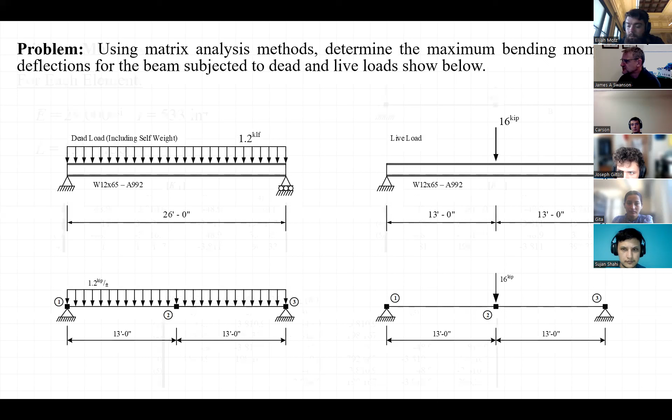One of the first steps is to develop our stiffness matrix. Even though we have two different load cases or patterns for this beam, we still only have one stiffness matrix, since the structure itself is the same for both load cases. So here's the element stiffness matrix K sub A, the element stiffness matrix K sub B, and when I assemble them you get the global structure stiffness matrix shown at the bottom.

My degrees of freedom are labeled at the top. You can see that degrees of freedom 1, 3, and 5 are displacements, and degrees of freedom 2, 4, and 6 are rotations.

I call out the beam as a W12 by 65, which has a moment of inertia of 533 inches to the 4th power. Each element has a length of 13 feet.

This is one place where I tend to confuse myself a little—sometimes I'll check my work and calculate the deflection as PL cubed over 48EI. When you use the L value in that equation, it's the span length of the beam, not the length of the elements. So you have to be careful with these types of problems, to the point where I actually keep a scratch pad to write things down, because it's easy to get confused, especially when the element length is half of the span length and so on.

Anyway, there's my unrestrained global structure stiffness matrix K.

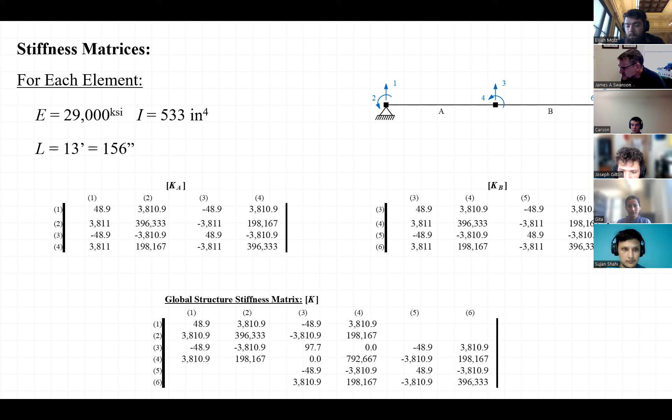The next step is to look at the loads. I'm going to examine the loads for the dead load case first, a uniformly distributed load with a magnitude of 1.2 kips per foot. The first thing I'll do is convert that load from kips per foot to kips per inch, since we're working in kip and inch units—another place where it's easy to make an obvious mistake.

So 1.2 kips per foot is equal to 0.1 kips per inch. And then when we calculate the equivalent end actions, we need WL over 2 for the vertical forces at each end of each element, and WL squared over 12 for the magnitude of the moment at each end of each element.

And so when we break that structure into its two elements, you can see the equivalent end actions that are shown there in green.

Now, when we write the vectors that correspond to the equivalent end actions, I have a piece for member A or element A, and a piece for element B. I have to be cognizant of what we defined as our positive directions or positive rotations for the degrees of freedom. So the 7.8 kips is negative in each case because that is pointing in the opposite direction of degrees of freedom 1, 3, and 5.

When we look at the moments, the first moment at the left end of member A is negative because it's opposite of what is positive for degree of freedom 2. The two moments at the center, 202.8, when it acts at the right end of member A, it is a positive value, but when it acts at the left end of member B, it is a negative value. Both of those are compared to the positive sense of degree of freedom number 4.

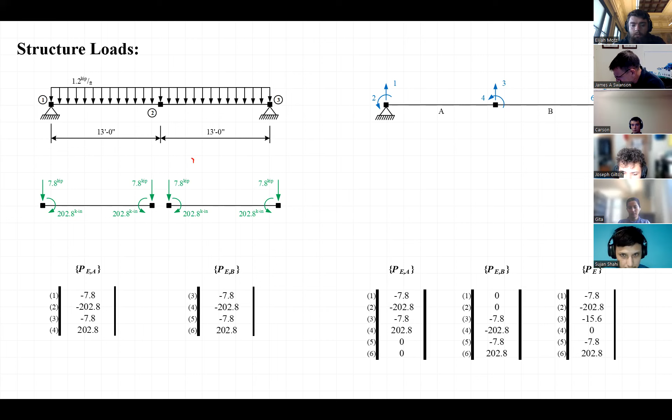And if we were to take all of these member actions that are acting right here in the center of this beam, then we would see that they cancel each other out, and we would end up with just a force equal to 15.6 kips.

I've drawn these equivalent end actions in green to remind me that they're not really acting on the structure, that those are just actions that are equivalent to the loads that are actually acting on the structure. So if I draw them in green, that's a visual cue for me that they are equivalent end actions as opposed to actual structure loads.

And that's important because when we come back in the end and calculate member bending moments and member shear forces, we need to back those out and we need to remove those because they're just a means to an end.

All right, so then the next step is to look at the live load that's acting on the structure. I have 16 kips acting at the center. And because I chose to put a node there at the center of the beam, that 16 kip load is just a nodal load. I call it P sub N to indicate that it's a nodal load as opposed to an equivalent end action.

And so when we look at both sets of loads together, I have my dead load on the left. I'm representing it in terms of the equivalent end actions. I have my live load on the right. So what I'm going to do is develop these load matrices that each have 6 rows and 2 columns.

This is where the difference comes in with the examples that we worked the other day. All the examples that we've worked so far have just a single column for the load matrices, and that's because we're just considering a single load case or a single load pattern. So my equivalent end actions, I have one column for the dead loads, another column for the live loads.

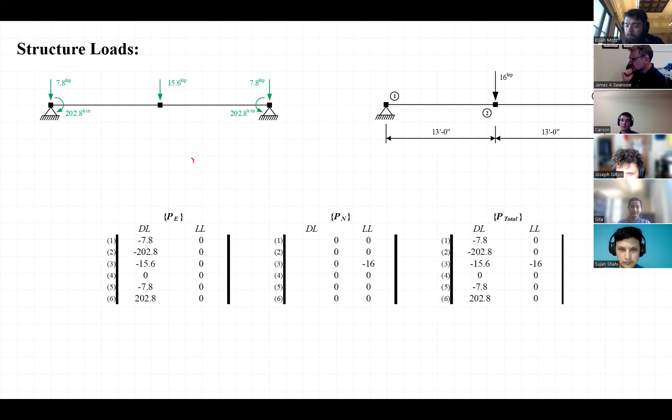When we go and look at our solution process for this, I'm going to reorder and partition the stiffness matrices. I have my P sub F, the loads acting on the free degrees of freedom, and P sub R, the loads acting on the restrained degrees of freedom. Then I can invert and solve for the free displacements, delta F.

So I have a center line displacement, a mid-span deflection, if you will, that is equal to 0.7982 inches for dead load and 0.6550 for live load.

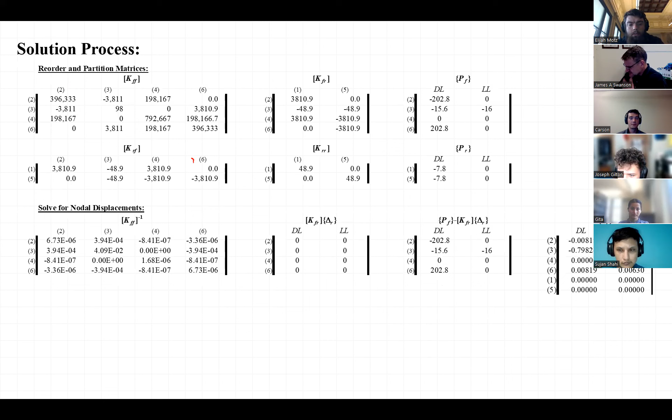What I can do then is augment that, add in the displacements that I have for the restrained degrees of freedom—those are zeros in this case. Then the next step would be to solve for my member end actions and then my structure reactions.

Excuse me. I had a quesadilla for lunch, and I'd be better off just drinking water and eating a protein bar.

Right, so for each of the two members, member A and member B, I have two sets of end actions—one set for the dead load, another set for the live load. So in this case, if we look at the center line moment, the bending moment due to dead load is going to be 1,217 kip inches, and the center line bending moment for the live load is going to be 1,248 kip inches.

So when you go through and do your homework, I think it's 5 different nodes, so you're going to have 10 degrees of freedom. There are 3 load sources—dead load, live load, and snow load—so each of the load matrices is going to have 3 columns. It's a little bit more involved than these, but you can use these as an example. Questions?

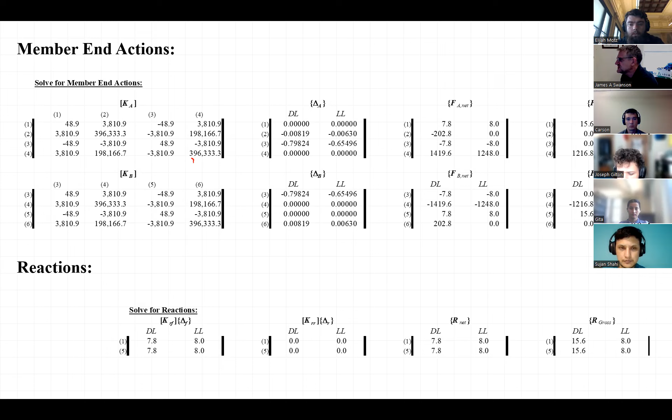All right, if there aren't any questions, then let's go ahead and shift our attention to the next topic, and that topic is property modifiers.

This kind of comes out of left field. A lot of you probably have some experience using these programs to do some modeling at some point or another, so you probably have an idea of what member loads are and nodes and joints and things like that. But I'm willing to bet that most of you don't have any idea what a property modifier is exactly. This is a really useful tool that's in SAP 2000 and, to a lesser extent, in visual analysis—something I find myself using more often than anyone would probably expect.

So let's use this as an example of what a property modifier is. Here are the 2 beams, the one beam with the 2 loads that we were just looking at. If we go back to first principles, we could see what the maximum bending moment is in each case, and we could calculate the maximum deflection in each case that's going to occur at the center line. We should end up with a bending moment of 1,216.8 kip inches for dead load.

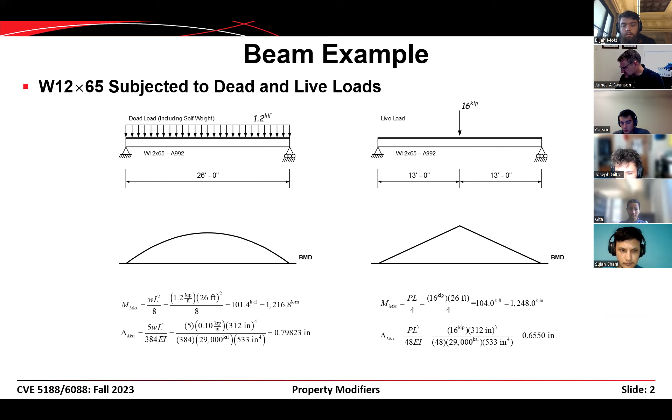Now, we've already gone through and done an analysis of the beam. We could analyze it as a 2D frame, where we have axial degrees of freedom, but we haven't talked about that yet in our matrix stuff. Or we could analyze it as a beam like shown on the right, and that's what we did in our example just a few moments ago.

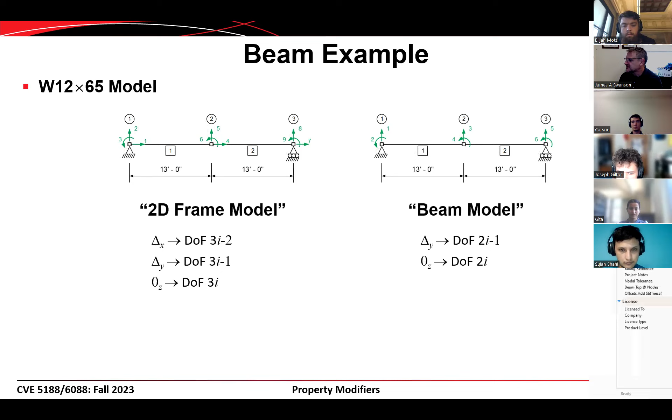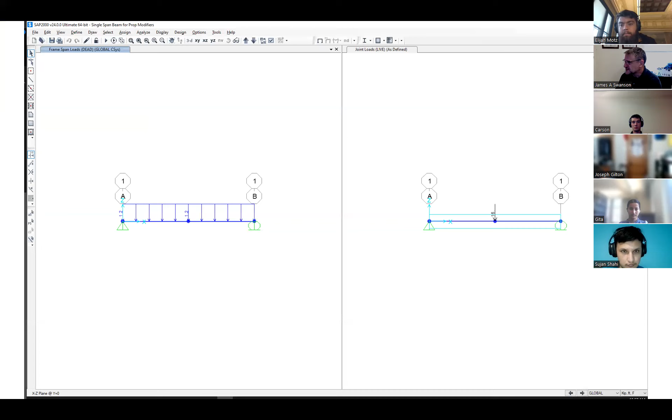So if I go in and model this in Visual Analysis like this, I get one set of results. Then I can go and model the same beam in SAP 2000. Here I have both load cases shown in SAP 2000, dead load on the left and live load on the right. And if I compare the results from these analyses, then this is what I get.

So the bending moments for dead load agree pretty well, 1,217 kip feet everywhere. The bending moments for live load agree pretty well, 1,248 kip feet everywhere. But when we look at the deflections, we get a different deflection out of SAP 2000 than we get out of our equation and out of Visual Analysis. And so you look at this guy here, that's an outlier, and that's an outlier.

The reason why those are different is because SAP 2000 is including shear deformations in the calculation of its stiffness matrix. I don't know if you remember this or not, depending on who you had as your instructor for your analysis class, but there are actually more than one source of deformation when you look at a beam subjected to transverse loads.

When we calculate PL cubed over 48 EI as the centerline displacement for a simply supported beam subjected to a point load, or if we calculate 5WL to the fourth over 384 EI, those are all taking into account the normal stress that's in there and the strain energy associated with that normal stress.

But there's a secondary source as well, and it's the strain energy associated with the shear stresses and shear strains. They aren't usually a primary player in the deflection or stiffness of flexural members, but they can be. How big a difference it makes is a function of how the beam is loaded and what the beam looks like. If it's a rather short and stocky beam where shear tends to dominate the behavior, then shear deformations are going to be a larger part of the overall deformation of that structure.

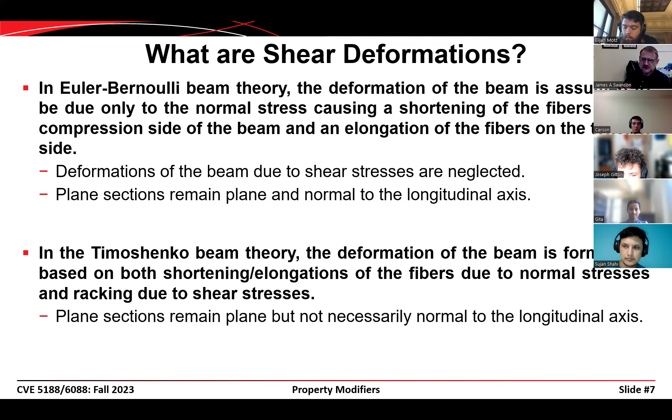Now, which is right and which is wrong? Well, both of these are just different ways of modeling the behavior of the beam. I think Timoshenko beam theory gives us results that are probably more accurate, but we're only aiming to be within 5% anyways. So the takeaway is shear deformations do affect the stiffness of our structures, and it can be important sometimes if we underestimate the stiffness of those structures. So it's probably better to include shear deformations if we can and if it's convenient.

Elements are less stiff or more flexible. For statically determinate structures, the deflections will be affected, but the axial forces and shear forces shouldn't change, right? If you go back and look at our results from this analysis, the bending moments are the same, even in SAP, because this is a statically determinate structure.

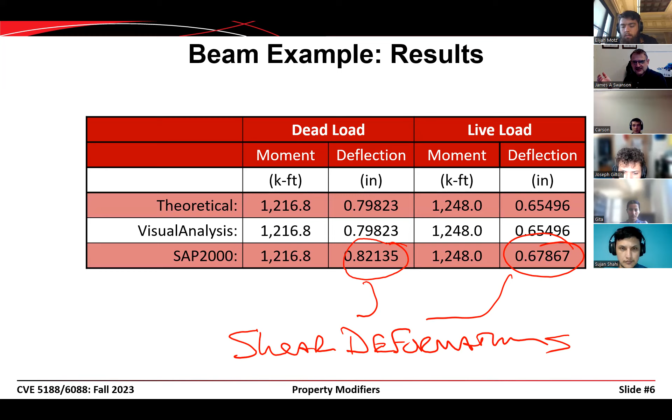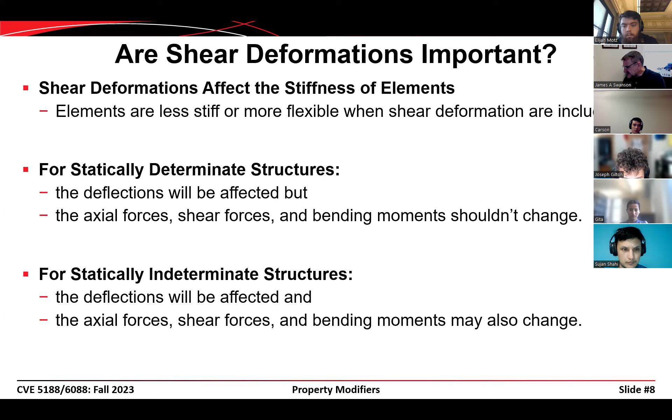If we go and model a second beam that's indeterminate, then we might end up with different shear forces and bending moments out of our SAP model because it will be an indeterminate structure. Shear deformations are more important when the ratio of shear stress to normal stress is higher. Shorter beams have a higher shear to moment ratio, and deeper beams have a higher shear stress to normal stress ratio.

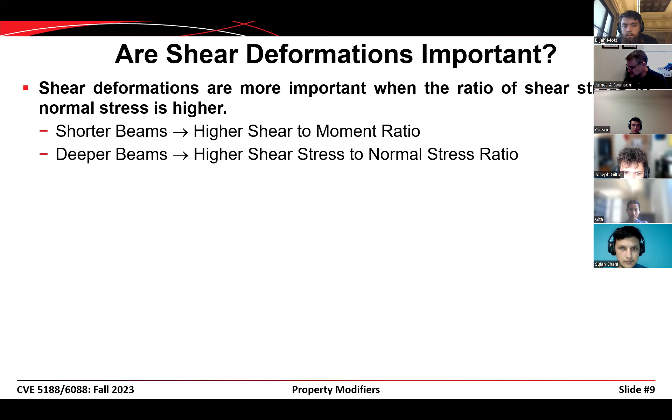AISC has language in its specification that says the effects of all of the following on the stability of the structure and its elements shall be considered: flexural, shear, and axial member deformations. So AISC in that statement says that we have to include shear deformations in our model.

Are you going to be found in non-compliance if your model doesn't include shear deformations? Possibly, but it probably won't make that big of a difference if you're designing a typical structure, a 6-story building, a 10-story building. It probably won't make that much difference.

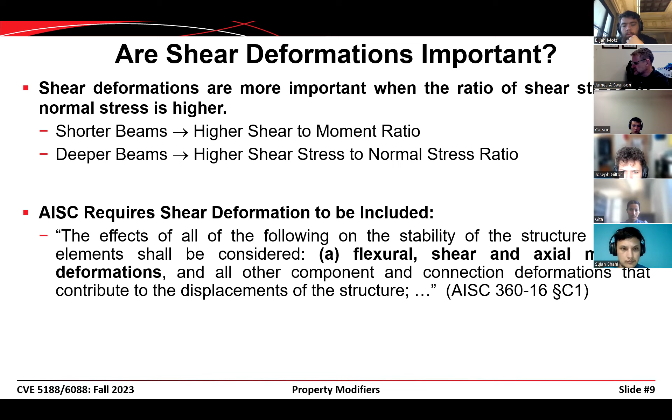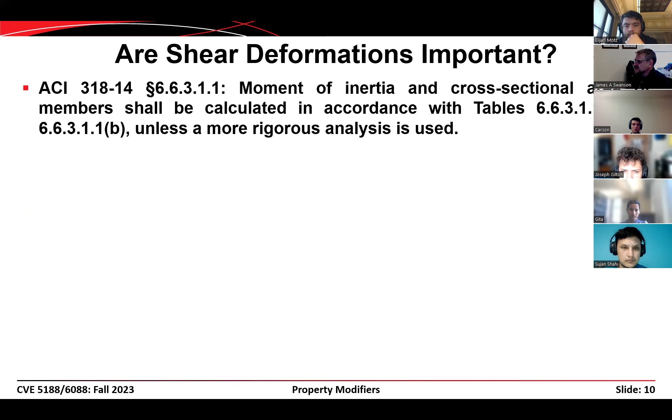ACI says that the moment of inertia in the cross-sectional area of members shall be calculated in accordance with tables, unless a more rigorous analysis is used. And if you go look at that table, it says the moment of inertia you should use is 70% of the gross moment of inertia.

That's to account for cracking in the member. You deal with concrete, you put a member into flexure, the tension side of that member cracks, and you end up with a moment of inertia for that member that is lower than what you would get if you just took the base times the height cubed over 12. So you have these modifiers used in the ACI specification, 0.70, 0.35, 0.25, to account for a physical phenomenon in the concrete that is modeled just using these modifiers.

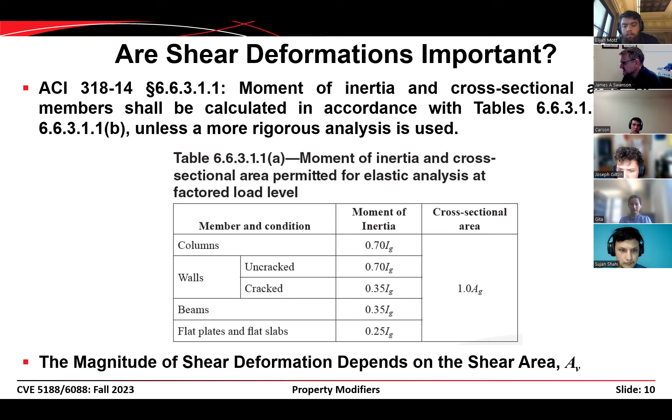The magnitude of the shear deformations that we calculate depends on something called the shear area, and the shear area is a function of which type of member we're using. These images, I think, come out of the user's manual for SAP 2000.

If you have a rectangular cross section like you would have for a concrete beam, then the shear area, we usually call it A sub V to give it a notation, A for area, V indicative of shear, is 5/6 times the base times the depth.

If we're looking at a wide flange section, then you can take 5/3 times the thickness of the flange times the breadth of the flange, in the case of weak axis shear. If you have strong axis shear, then you just take the area of the web instead.

This is a little bit strange, notice how the loading is applied here. You have a different shear area when the load is parallel to the web than when it's parallel to the flanges. So the shear area of the member depends on how it's loaded and what the shape of the member looks like.

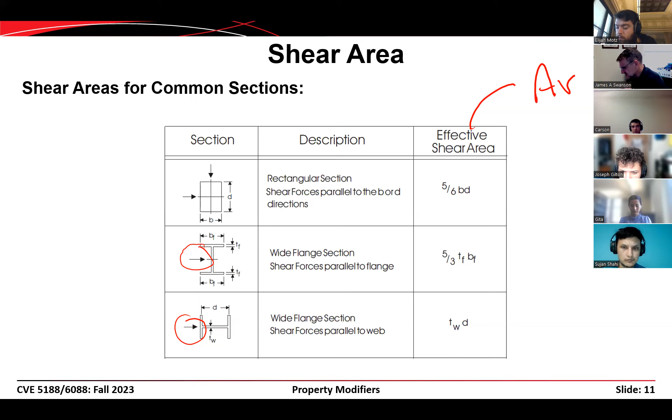By default, Visual Analysis does not include shear deformations, but it can if you want it to. By default, SAP 2000 does include shear deformations, but you can tell it to neglect them if you want to. So both programs are rather dynamic, they can include or exclude, but they make a different choice about how to handle them by default.

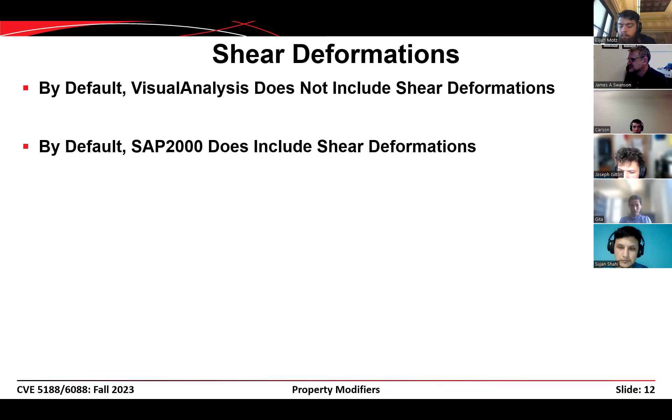So when you go and compare results you get out of SAP 2000 with results you get out of Visual Analysis, it's not uncommon to see differences in the two sets of output because of the way they handle shear deformations.

When those values are set to 0, that's an internal switch for Visual Analysis that says, let's ignore shear deformations entirely. So there's an if statement somewhere during the assembly process where if the shear area equals 0, we just ignore the shear area entirely.

By default, SA1 and SA2 are set equal to 0, which tells Visual Analysis to exclude shear deformations. Shear effects are included only for user-defined sections with non-zero shear areas.

And if you want to include shear deformations in your Visual Analysis model, what you have to do is go in and define a user-defined cross-section, and then enter manually the values for SA1 and SA2.

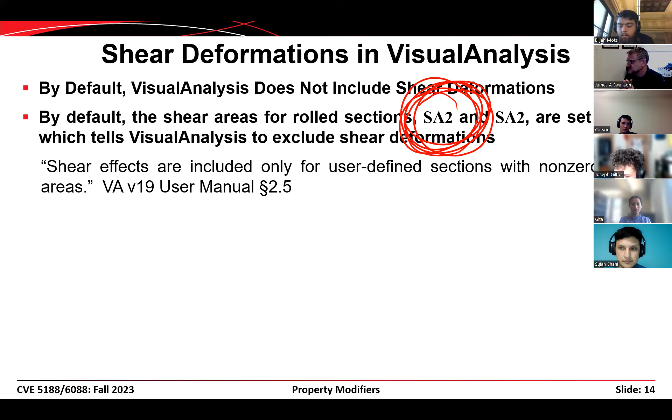So if you go in and try to change those numbers, you can't do it. It won't let you change them because it's a database shape, and if it let you change them, that would create all kinds of problems.

But there is a way to change that indirectly. To suppress shear deformations in SAP 2000, we use property modifiers. Property modifiers are basically scale factors used to modify computed section properties. They can be used to suppress shear deformations, our current conversation, or to account for cracking of concrete or other factors not easily defined in the geometry or material property tables.

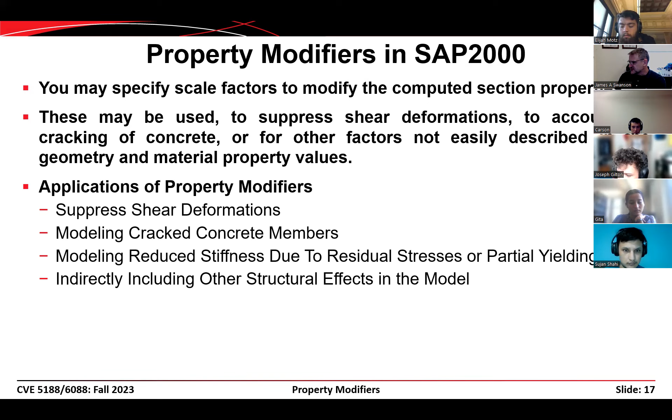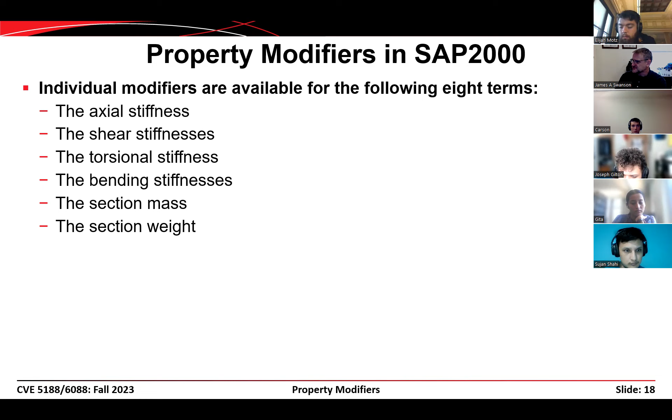Individual modifiers are available for the following terms. I only count six, but there are shear stiffnesses in two directions and bending stiffnesses as well. So here are the property modifiers.

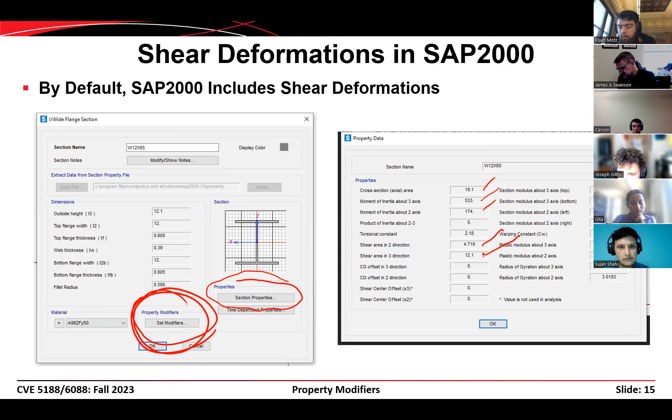Let me go back. If we go back here, there is a button at the bottom that lets us set the property modifiers for that cross section. If we click on that button, it brings up this dialog box, and we can go in and set these modifiers to some other value.

By default, they're equal to 1, which means we just take 1 times whatever value. So we take 1 times the cross-sectional area defined for the W12 by 65, and 1 times the moment of inertia defined for the W12 by 65, but we can set these to other values.

In fact, if we want to suppress shear deformations in our SAP model, what I typically do is specify a value sufficiently large so as to render the shear area as infinity. I usually type in six nines to get there, which takes me to six orders of magnitude larger than what it would have been otherwise.

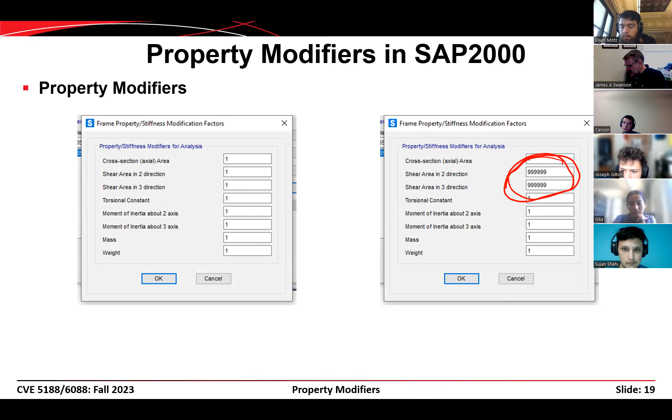And if we go and modify the model we had at the beginning of this lecture using these property modifiers, what we get are deflections out of SAP 2000 that are almost identical to the deflections we got out of our theoretical solution and out of VisualAnalysis.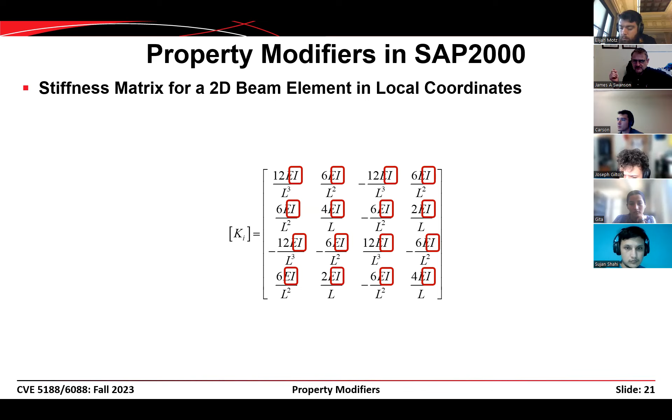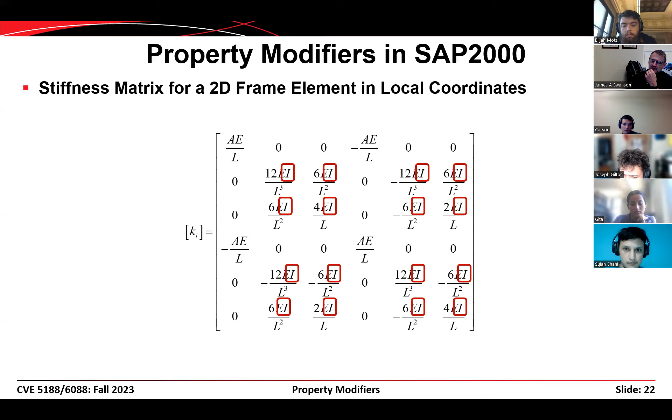And then we could modify the values of I here. So one thing that's left out though is the material properties E. And as it turns out, in SAP 2000, you can modify the material properties as well.

Now, you have to be careful. There are several different places in SAP 2000 where we can modify the section properties, several places where we can stipulate property modifiers. We can apply them to a cross section that we're using in our model, like the W12 by 65, or you can apply them to individual objects like a frame object or a beam object. So it's possible to apply these modifiers twice, and that can be problematic.

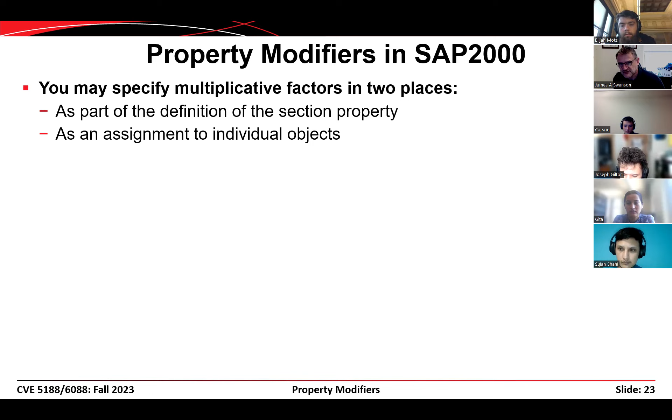If you go in and specify a property modifier of 0.7 for a cross section, and then you click on a frame element and specify a modifier for that frame element of 0.7, what it's going to do is multiply 0.7 for the first case times 0.7 for the second case, and then multiply that times the stiffness quantity that you're modifying. So you do have to be careful there.

And as I understand it, you can also apply modifiers to materials as well. You can modify the mass, you can modify the modulus of elasticity, you could also modify shear modulus of elasticity, et cetera. Modifiers cannot be assigned directly to a non-prismatic section property, but any other modifier, okay.

So these are useful, especially if you're modeling concrete. I have an assignment where we go in and do modeling of concrete. It's like my one token assignment to include to be non-denominational in my course. So we might explore that. So it's useful, and we can do it.

You can use property modifiers in other cases as well. Another case where we do it is if we have a two-dimensional model of a building, and I want to include the rigid diaphragms - when we have a floor slab that is rigid in plane, you can specify a property modifier of 1 million for the cross-sectional area of a member, and that is a good way of modeling rigid diaphragms in a two-dimensional model of a structure.

So they're very useful, but they're also very powerful, and they require a modicum of understanding by the user of what they're actually doing. So when you guys are bemoaning my lectures on matrix analysis, they get kind of mathy, a little bit involved, and it can be tedious when you're trying to chase an error or find a mistake in the matrix stuff. The reason why I insist on including that is for things like this. If I tried to explain what a property modifier is without you guys understanding what a stiffness matrix was, I don't think this would be as impactful as it is.

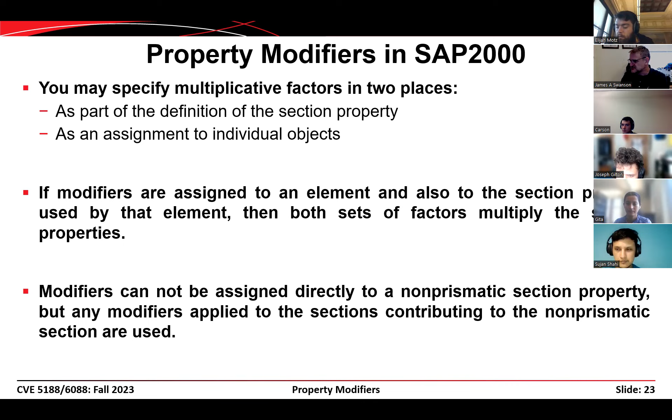All right, so what about VisualAnalysis? Well, VisualAnalysis includes something similar to a property modifier. They call it a stiffness factor instead. And so if you click on a member, then you can go in and modify these stiffness factors. They have stiffness factors for I sub y and I sub z, that's the strong axis and the weak axis moment of inertia. They include a modifier for the area as well.

And so these modifiers are a little bit different. It's what percent of those values that you want to use. So if you want the full value, you type in 100 here, and that means you're using 100% of the value that was stipulated for that cross section. So if we were modeling concrete and it was a flexural member, we would use 70% of the moment of inertia. And if we were doing the same thing in SAP 2000, we would stipulate a property modifier of 0.7 instead.

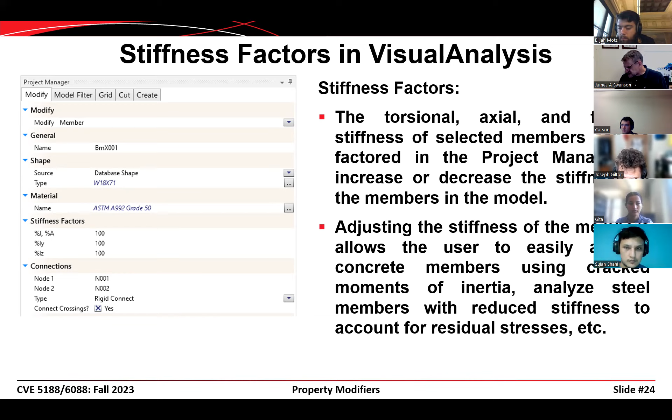All right, so that's the end of that conversation. An interesting discussion. I'm surprised nobody's asked me about it yet.

Maybe you've noticed that some of the results you get out of SAP 2000 are a little bit different than what you get out of VisualAnalysis, but maybe you've just been dealing with so many numbers that you haven't really had a chance to digest the results. That's probably the reason why. When somebody asks me that question, usually the answer is that SAP 2000 includes shear deformations and VisualAnalysis does not, and we use property modifiers to make that accommodation.

So what we're going to do here is start off with a review of what output stations are. They're basically designated locations on a frame element where output forces are calculated, where design checks are calculated, and they're used for plotting points on graphical displays of force diagrams. When output is exported to tables, it's only exported at these pre-designated places.

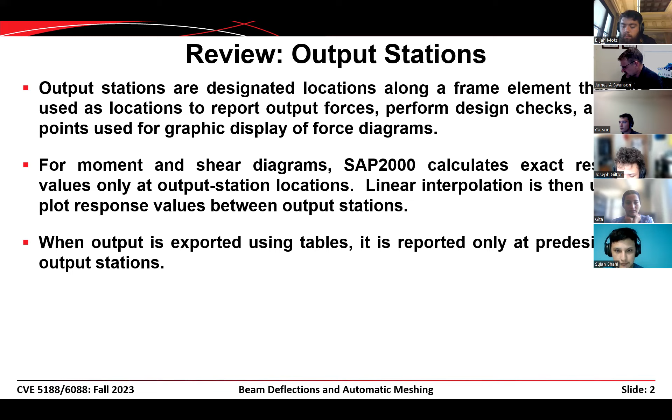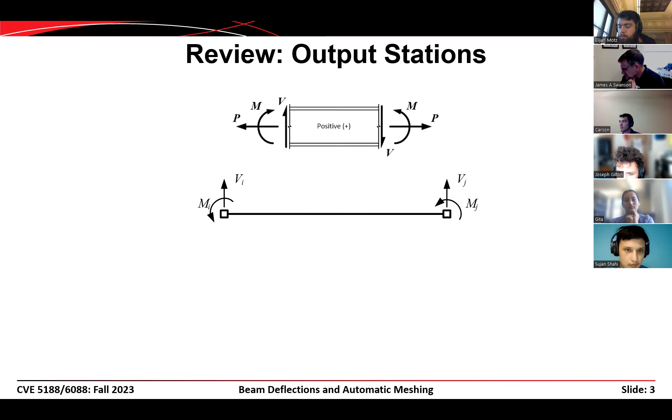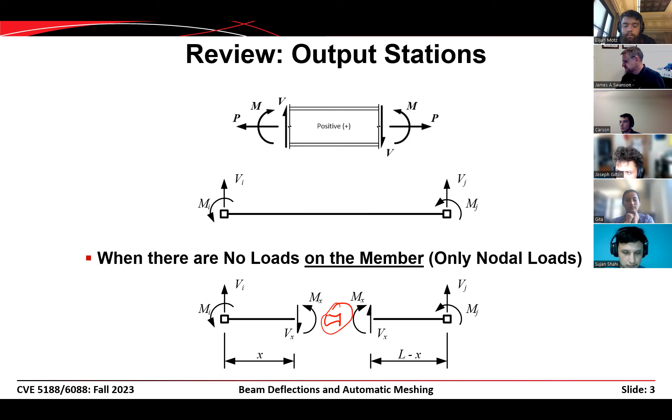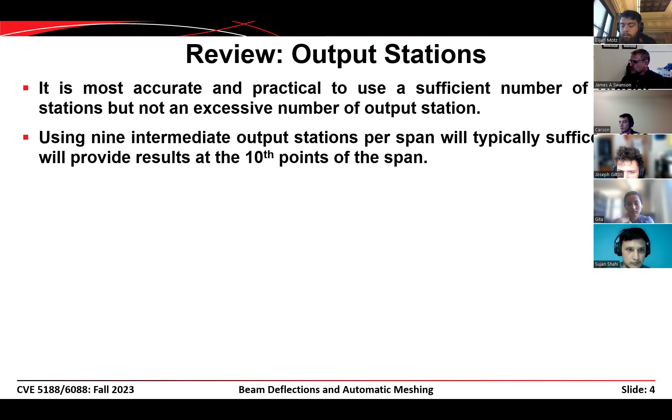And then here's our beam element formulation. We've talked about this ad nauseam, and this point right here, the point where we're calculating a moment or a shear, this would be an output station for our member. It's most accurate and practical to use a sufficient number of output stations, but not an excessive number. I usually use 9 intermediate points, which gives me output at the 10th points of the members.

SAP will automatically report the output of each element unless there's a rigid offset defined, in which case you get something a little bit different. We haven't talked about rigid offsets yet. Defining 11 stations results in output at 10th points, and this is how we define that.

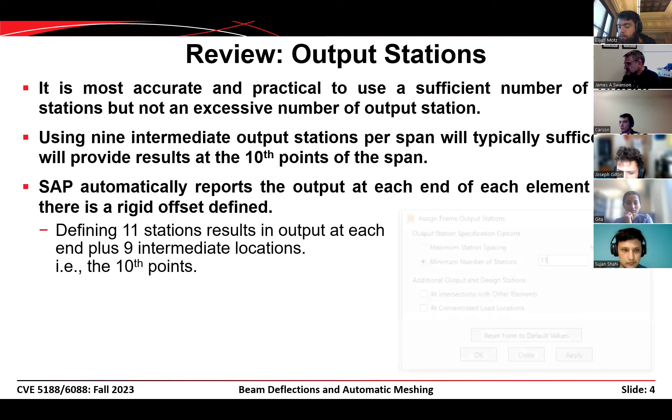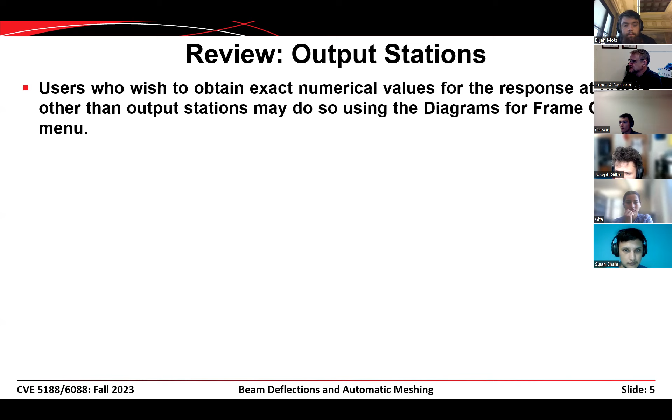So users who want to obtain exact numerical values for the response at points other than output stations may use diagrams for frame objects.

So let's go back and look at our beam again. We have a 26-foot long span, a dead load of 1.2 kips per foot, but this time instead of one single point load at the middle, I'm going to have 2 point loads spaced 8 feet from each end of the member. Our bending moment diagram remains unchanged from the last lecture with respect to dead load, but it changes with respect to live load. Now we have a moment at the center of 1,536 kip-inches and a centerline deflection of 1.0565 inches.

So what I'm going to do is go in and play with the number of output stations we use for our beam. I'm in SAP2000 and I've generated a model of this thing. I've got 2 nodes, one at each end of the beam in this case - one node here and another node there. So I've got one member, one element, and two nodes.

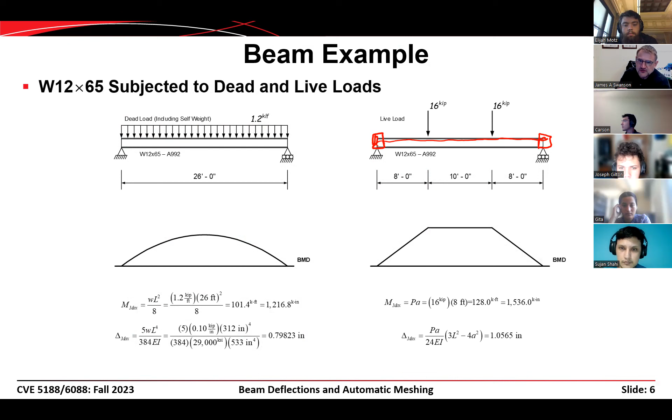If I specify two output stations, that's basically going to give me output only at the ends of the member. If I go in and look at my results, look at the values I get here when I look at the bending moment... the shear force is 15.6 kips. The beam displacement I get, deflection in the two direction, is equal to 0.

And the bending moment that I get is equal to 0 as well, so I'm basically getting garbage output for these results. You might wonder why. Well, the answer is because I'm only calculating the values at the end of the member, right? Two output stations gives us output there.

I should come in and fix these, I don't think these are right. I should come back and look at those. For the shear force diagram, it works out just fine for the dead load case. For the live load case, it's not right at all, right? The shear force diagram for live load should come up like this and then go back to 0.

And for the bending moment diagram, it should be like that, but it's not giving me the right output at all. If I go in and specify 3 output stations, now I have output stations at the left end, the right end, and at the center line.

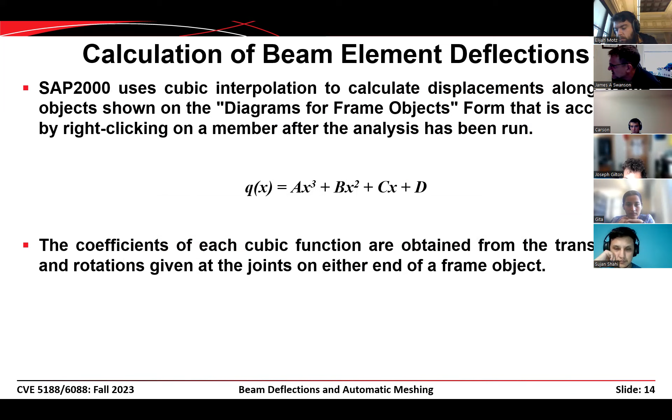So if we go in and look at our beam element formulation, we basically have 4 deformations associated with that element. We have 2 deflections, a delta I and a delta j, and we have 2 rotations, a theta I and a theta j. So when we have only 4 different deformations associated with each element, the best we can do is a cubic.

If we went and tried to use a 4th order curve, we would have ax to the 4th plus bx cubed plus cx squared plus dx plus e. That would be 5 constants that we would need, but we only have 4 boundary conditions. So we can't use a 4th order curve.

So the way that this shakes out is like this. We can go in and say that the deformation q at x equals 0 is equal to delta I. So q is our displacement. We can say that the deformation q at x equals L is equal to delta J.

And then we could say that the derivative of q at x equals 0 is equal to theta sub I, and the derivative of q at x equals L is equal to theta sub J. So if you go through and write these 4 boundary conditions and apply them to the general form of our cubic equation, what you can solve for are those 4 constants, A, B, C, and D.

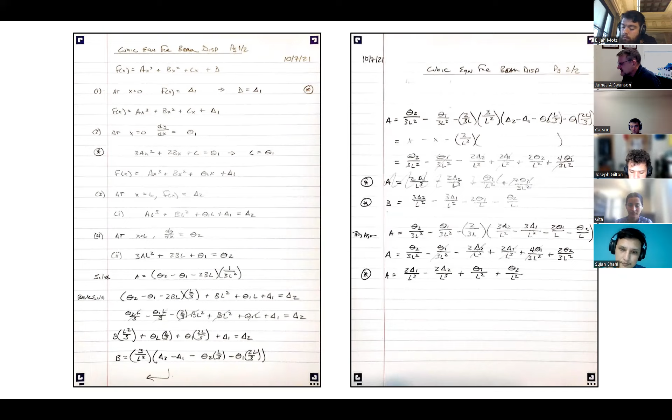And so I did that, and I did it by hand several times, and I decided not to type it up, and I just scanned these pages instead. And so here's the funny part: I got all the way through this and realized there was an error someplace, so I had to try again. Ultimately what you can do is come up with equations that you can use to determine these constants A, B, C, and D. And if you go through and do it right, I think, then this is the values that we get for A, B, C, and D.

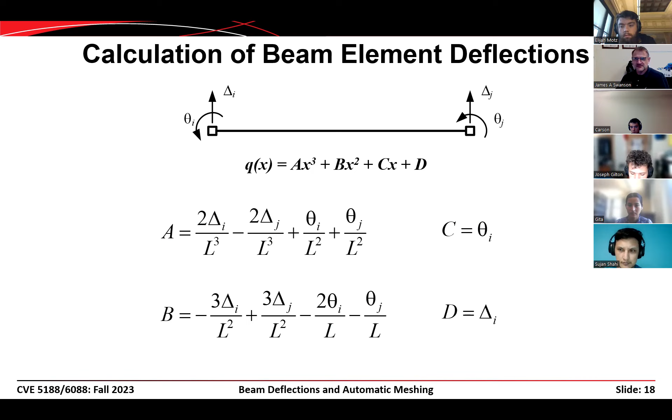So then the question is, well, if that's just a cubic approximation, is that accurate or is it not accurate? Well, the answer is that it depends, right? And just like everything else, there's no black and white. So if we go back and look at our Euler-Bernoulli beam theory, we can see that the displacement Q of X is equal to the 4th derivative of the load. You guys probably remember this from your structural analysis. If you were integrating to find the deflected shape of a beam, you start with the load diagram, you integrate 4 times, and you get the displaced shape.

So that means that we would end up with, depending on the type of loading, either a 3rd order curve or a 4th order curve. If we end up with a beam that has point loads on it without any distributed loads, then the curve that we end up with after integrating, we go from a 0th order curve to a 1st order curve to a 2nd order curve to a 3rd order curve. So if we have a beam with just point loads, then a 3rd order curve does a pretty good job of approximating the deformed shape. But if you have a beam with a uniformly distributed load, then you end up with a 4th order curve, something times x to the 4th as the deformed shape of that beam.

And so when you have a beam subjected to point loads, SAP 2000 does a pretty good job of estimating what the beam deflections are using that cubic approximation. But when you have a beam subjected to a uniform load, or even worse, a triangular shaped load, then SAP 2000 doesn't do a very good job at estimating beam deflections. It'll be close, but it won't be exact.

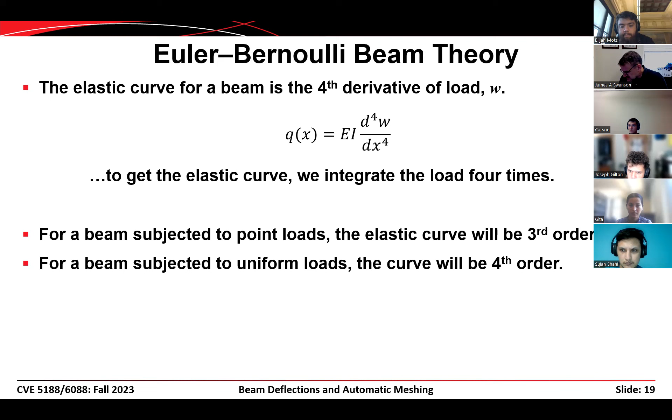And so if we go back and look at our beam diagrams back here, you can see that for the case on the right where we have a couple of point loads on the beam, it's really, really close, right? 0.01% error. But in the case on the left where we have a uniformly distributed load, we have an error that's 0.75%. That's probably not going to cause any real problems in any realistic structures, but it's not as close as it is for point loads.

So when you go in and use these beam diagrams, I want you to be cognizant of the idea that these are approximations, and the approximations are good for beams loaded with point loads, and they're okay for beams that are loaded with uniformly distributed loads.

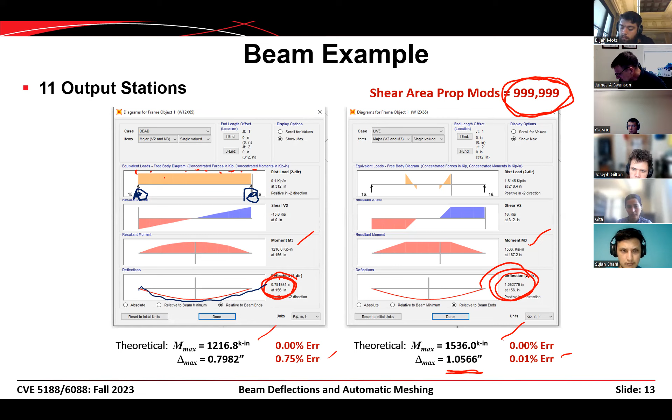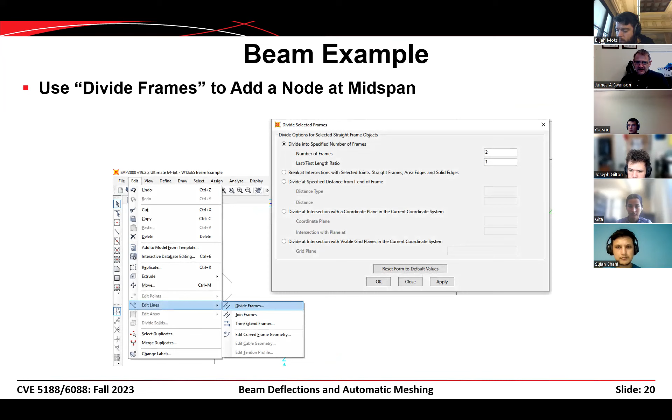Now, what happens if you want to get the exact results? Well, what you can do is go in and add a node at the point where you want to get exact deformations. If you want to know what the deflection at the midspan of a beam is, add a node there. One way of doing that is going into SAP 2000 and clicking on that frame and saying, I want to divide that frame into 2 frames, with the same length at each end. Then it'll put a node at the middle of the beam, and then you can do a mouse over, and the deflections that we get shown on the left for dead load are exactly what we would expect based on our Bernoulli beam theory.

So the takeaway here is that the only place you get exact displacements out of a model are at the nodes. Think about that with respect to our matrix analysis of beams. The only place where we're actually calculating values of delta are at the nodes within the model. Anywhere else we can calculate bending moments and shear forces, but we never actually calculate the deflections along the length of an element, because it's really hard to do. So that creates an issue.

If we go back and look at our exact displacements, what I've got are two different elements. I've got an element here, element A, and another element there, element B, the same thing here, element A and element B. So I can right click on this member and select beam diagrams.

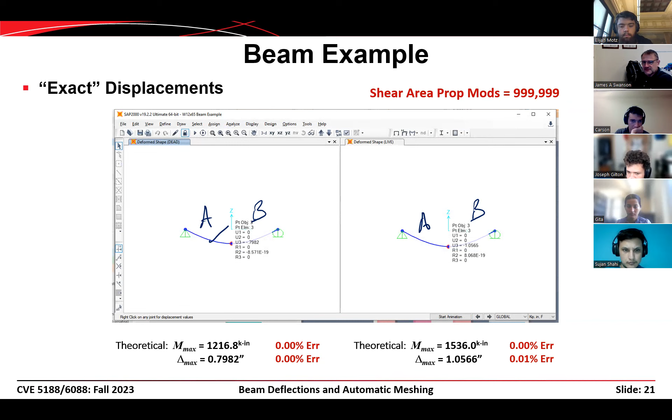The diagram dialog shows me the bending moment diagram, shear force diagram, and displaced shape, but only for half of the beam. I took that full 26-foot long member and divided it into two, so now this is a 13-foot long member. Look at the displaced shape - it isn't at all what we expected it to be.

The reason for that is, by default, the displacements in the diagram window are shown relative to the ends of the element. See this little checkbox down here at the bottom? So it's showing the displaced shape relative to the ends. If we want relative to absolute, we can click on absolute. Here's the relative displacement, and here's the absolute displacement. If we go back and click on absolute instead, then we get a displaced shape that makes a lot more sense.

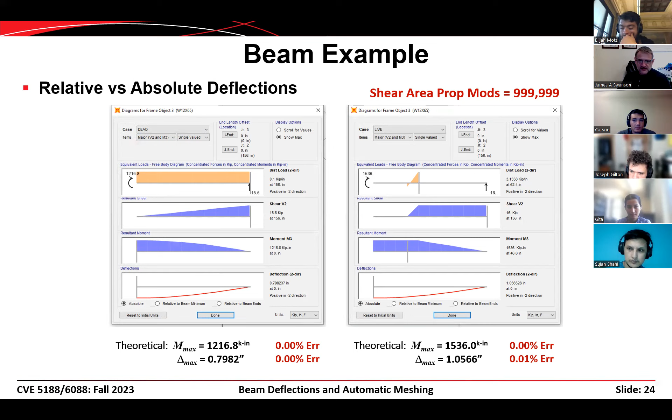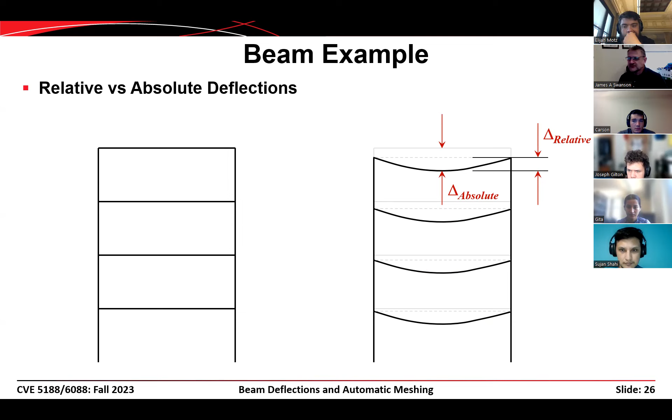So then the question is, do we always just want absolute? Why don't we just click absolute and make SAP give us absolute deformations? Well, the answer is no, because if we're looking at beam deflections in a structure like this, you don't want the absolute deflection of that beam - you want the relative displacement, not including the shortening of the column. That's why they give you that option. So you have to be smart enough to know which one you want.

So there is a better solution, and that's to use automatic meshing of the elements. You can go into that model, right click on the 13-foot long beam element, and tell SAP: yes, this is one line object, but before you perform the analysis, subdivide it into X number of analytical elements. So you have one line object, you divide it into say 10 analytical elements, and then you'd have a stiffness matrix - 11 times 2 would be 22, a 22 by 22 stiffness matrix for that one beam. And it'll do that.

Then when you're done with the analysis, you can come back and right click on that single line object and plot the deflections, the moment diagram, and the shear force diagram for all 10 of those beam elements that it used. I'm out of time, so I'll stop here, but when we get back together on Tuesday, I'll show you how to do that in SAP 2000.

I've got still another 12 slides in here or whatever. But this is a very powerful feature in SAP 2000 that allows you to include a lot more nodes in your model. That's a good thing, because the more nodes you have in the model, the more accuracy you have in computing deflections. But it's a bad thing, because the more nodes you have, the bigger the stiffness matrix gets and the longer it takes to actually perform the analysis.